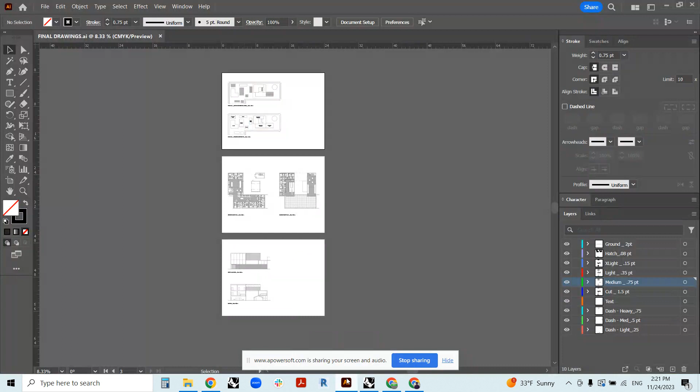So this is a tutorial for your final drawings. I'm considering this my last major piece of teaching or instruction for you guys. We've done a lot of conversations around programming. Design conversations have been one-on-one or in small groups, not necessarily standardized, but more individualized based on each of your approaches. So for drawings, we haven't done a whole lot of instruction, and I'm hoping this will serve that purpose.

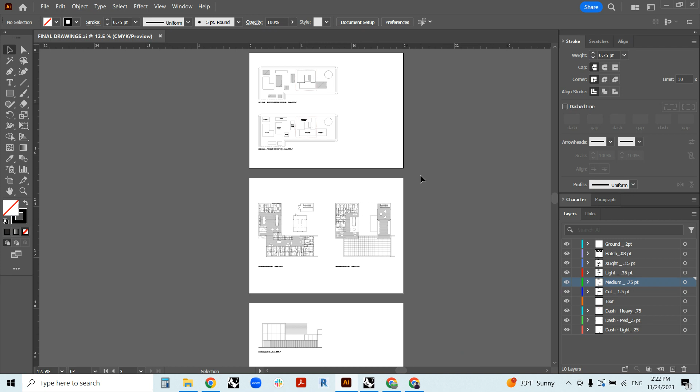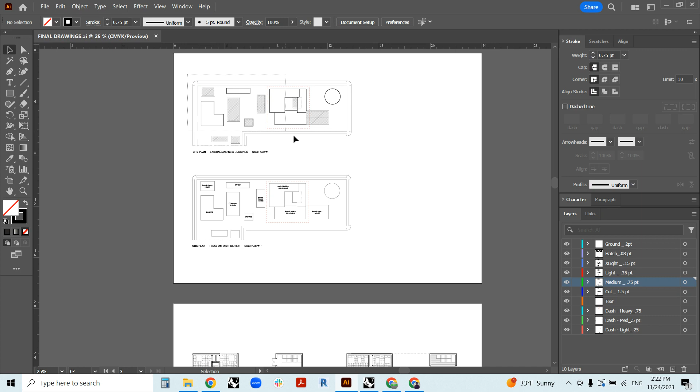So I've also changed up the formats a little bit. Originally, I was going to have you guys do Strathmore, which was 32 by 40, and I think I want to change it back to Bristol sheets, which are 18 by 24. And then we'll print at two scales. We'll do full site plans at 1/32, and then we'll do a detailed portion at 3/32, which is the same scale of your model.

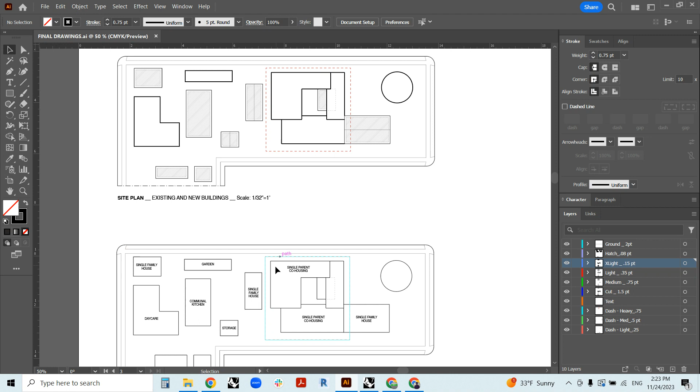So the big shift is moving away from developing the whole site to just a portion in full detail. My concern is that by asking you guys to design the full site, you really won't get into more substantial drawing and development of a portion of a building, which I think is appropriate for your first studio. So I designed a little example building here. And then the portion in the red is a co-living situation for single parents. So that red dash is then developed in plan, elevation, and section.

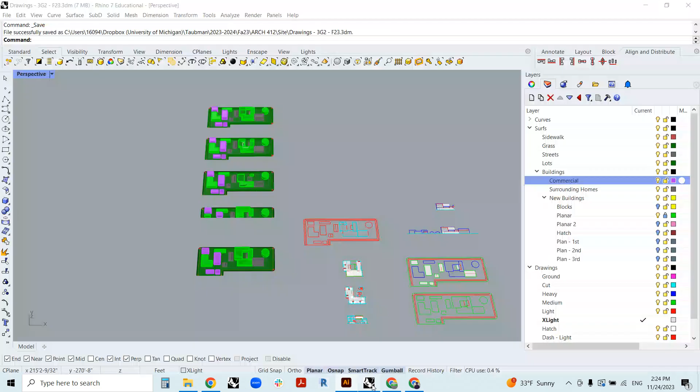So we're going to go from a Rhino model situation, which is very low detail like this, which I think is probably something that you guys have right now. And we're going to go to plans that have a lot more detail. We're going to talk about line weights. We're going to talk about detail. And we're going to talk about some basics.

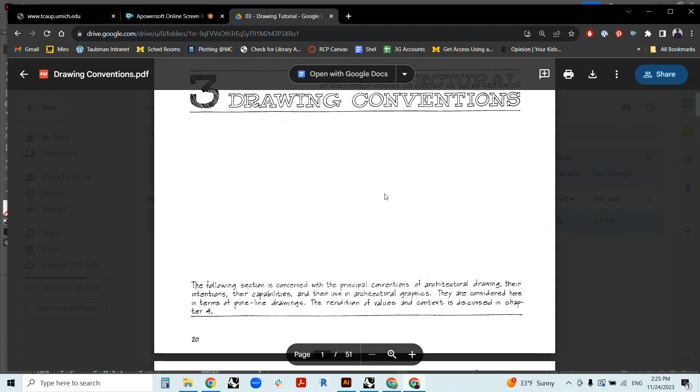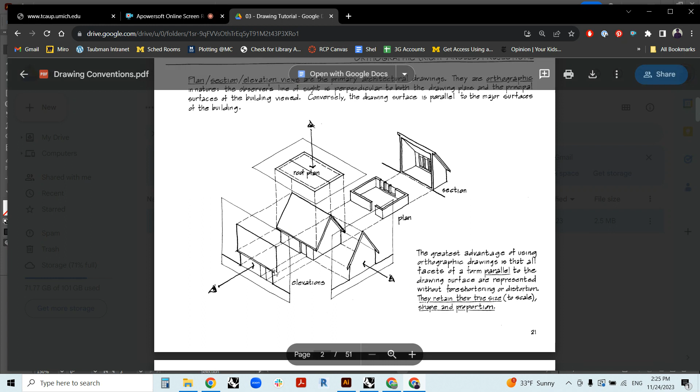So I believe I shared this with you all in the summer, for those of you that did the summer, but just to rehearse it again, we're looking at basic orthographic drawings, and this is the breakdown of how we can think of them. So in the center here is the house. If we look from above, it's a roof plan. We look from the sides as our elevations. Both plan and section are a cut through the building, a virtual cut through the building. The plan is cut 3 feet off of the ground or whatever floor height that you're cutting at. Section can be cut anywhere.

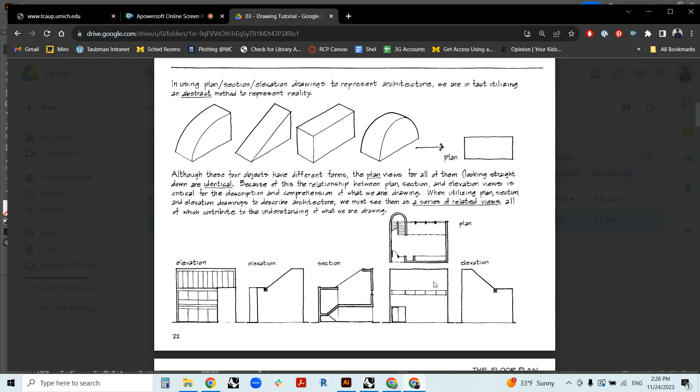All of these are considered multi-view drawings, in that you really need to see multiple views to understand the building as a whole. So this top diagram is just showing that all of these shapes have the exact same plan, which means that you can't understand any of these shapes simply from the plan. You would need to see plan and elevations at the minimum to understand the full shape of this. And so you really piece together plans, elevations, and sections to understand a building through orthographic projection. Again, the plan cut here, so that's a cut 3 feet above, and you can think about this either as a virtual operation or just as you're drawing it, think about what you would be cutting through at 3 feet.

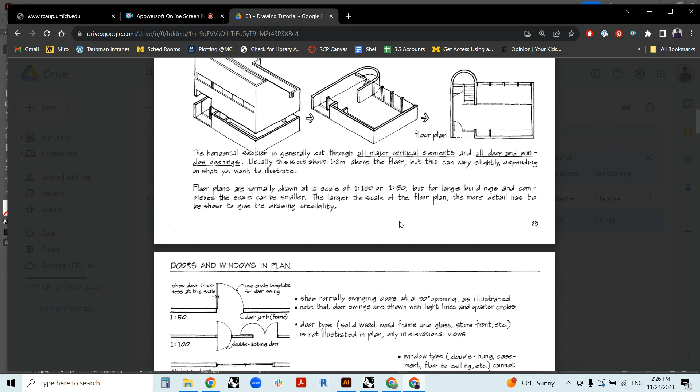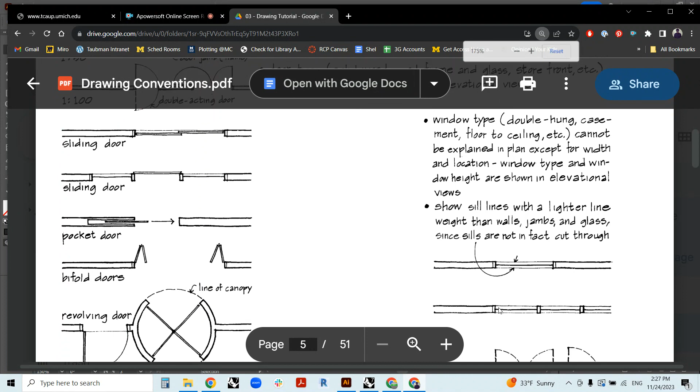Some notes about doors and windows. You really simplify doors. You can show a thickness and a swing, but that's about it. Sliding door, maybe just show two rectangles that partially overlap. If you want to do mullions, sometimes you can do a small rectangle for the frame and then a single line in the middle.

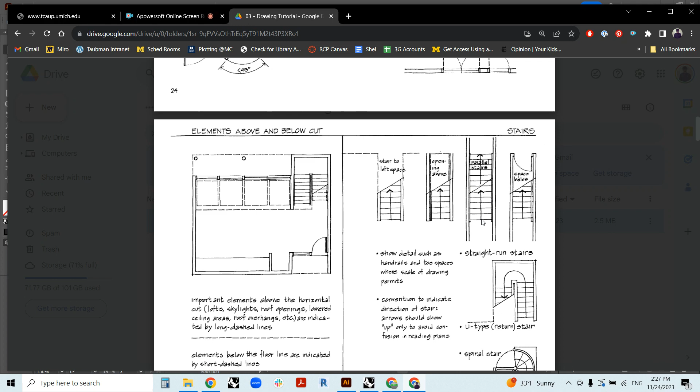And some notes about stairs. So if you're drawing a stair, you cut it at that 3 feet mark, and then if there's nothing below the stair, you can just show a dashed line as it continues up. Or if you have parallel stairs, you would show stairs on both sides because the cut is cutting around the floor that you're on, and then you're looking down at the stairs below. Some notes about walls and poché, reflected ceiling plan. Again, the section is also a cut, so you can think about a virtual cut through the building, what you would see.

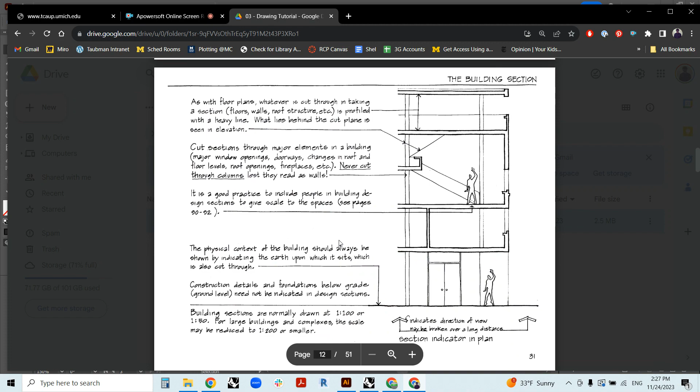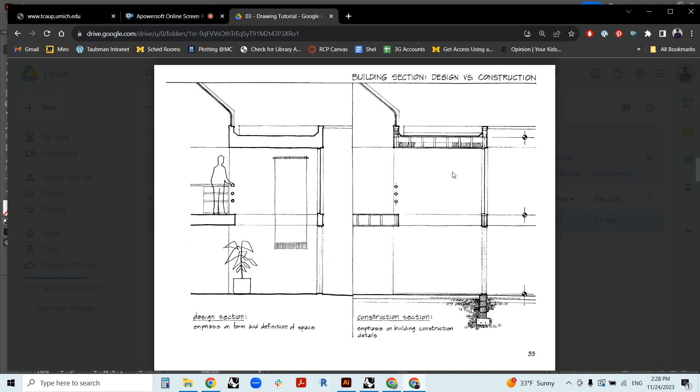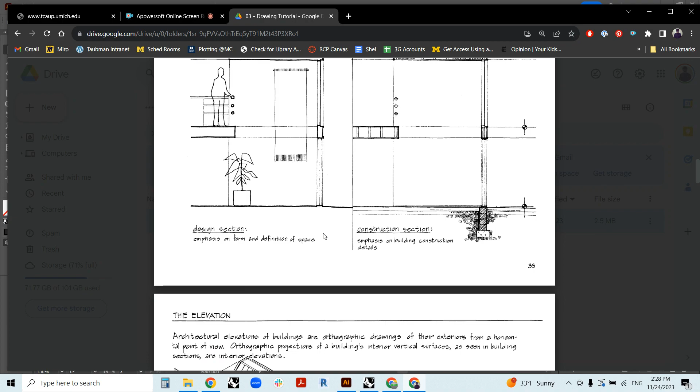And then one thing I want to point out is the way that you deal with the ground. So Francis Ching, the author of this book and a lot of diagrams that we've looked at, talks about the difference between a design and a construction section. Construction section, you would actually be showing some of the materials. You would show the foundations, maybe the framing, insulation. You might be doing this for construction class. Whereas a design section, you're not concerned with how the thing is built. You're just concerned with the outlines of the building mass. That goes all the way to the ground where you're not drawing the foundation. You just continue the drawing and you can move that right into a wall. So that's what you'll see that I've done for the example drawings.

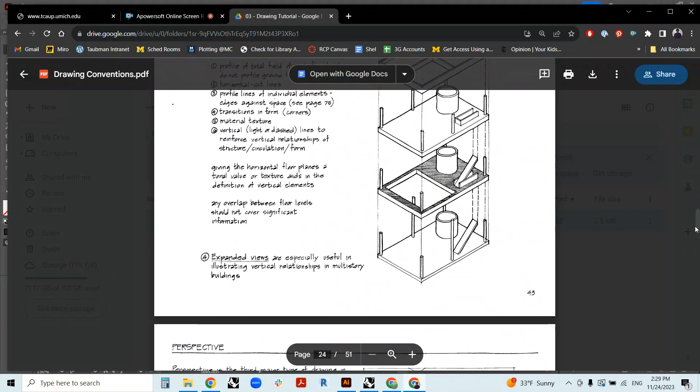Some more information here for you all to look at. Gets more into details about isometric views, perspectives, etc. But definitely think about and look at and review the orthographic information because that'll be the basis of what we work on together.